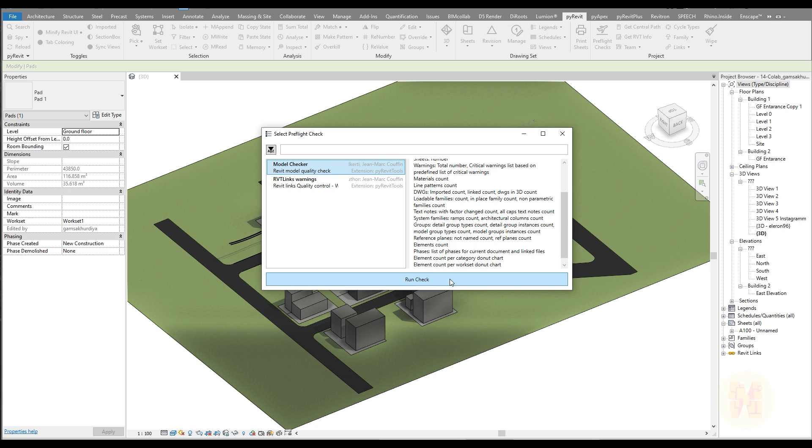Let's check our model. Here is model checker, I will select it. Here is a small instruction about what will actually be checked, but I'll show you in the end, or you can check the result yourself. I will start the result. Here you should say yes, because it's the scenario of your checking. That's it, and here you get the pop-up menu with the checks.

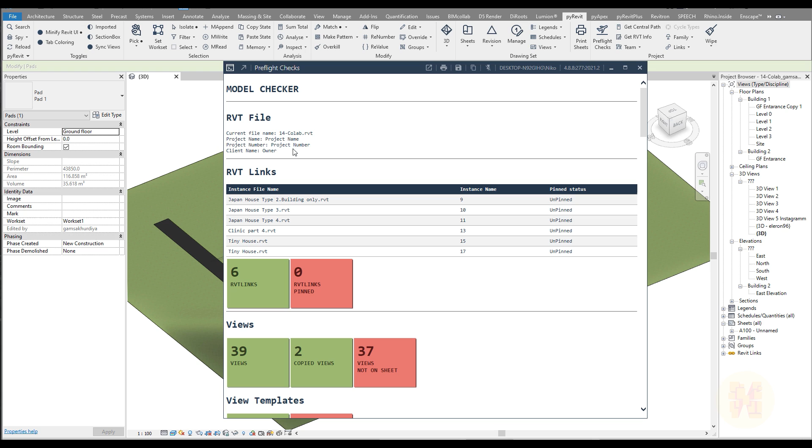I will show you, we will start from the main page. Here is the name of our file and main information. Here is all the file instances in our file. As you can see, this is correct because inside this main file I have a lot of different imported Revit links, here are our Revit links. How many views you have, how many views not on sheets, view templates, schedules, and a lot of different information you can get just by one click.

You can even save this information and transfer it, for example, to your architect, saying like, guys, you have thousands of views not on sheets, please delete some views which you're not using, or you can delete them yourself. Here is the nicest thing, the warnings types.

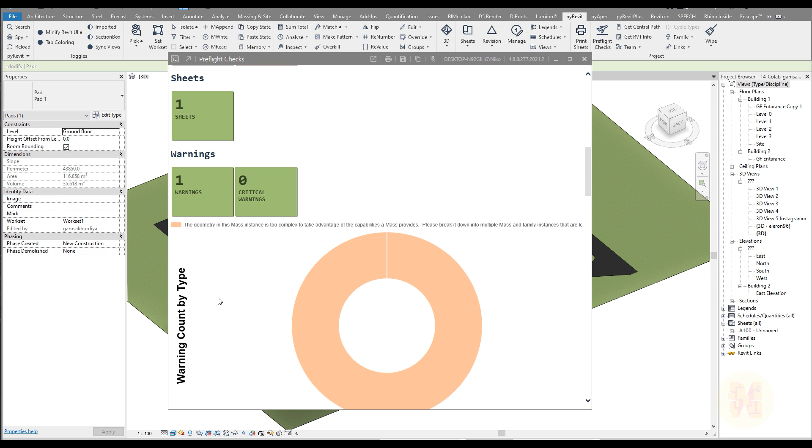As you can see, the geometry mass instance too complex. This really helps you understand, for example, when you get warnings, divided by which type of warnings you have. Materials, how many materials you are using in your project, and what I really like, this is loadable families in place, families not parametric, and a lot of different things.

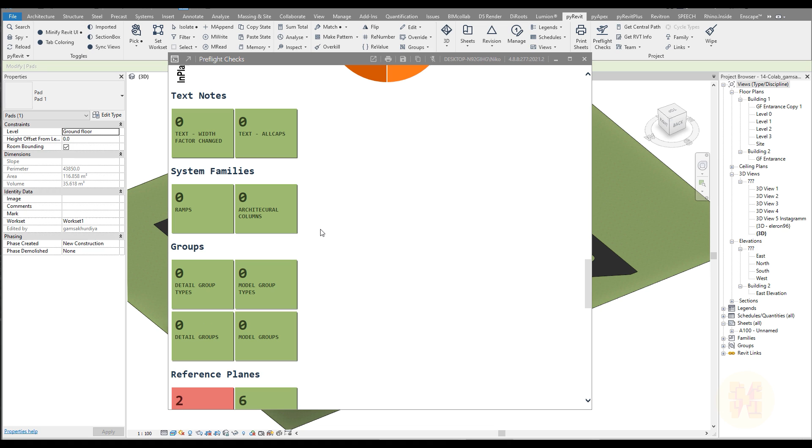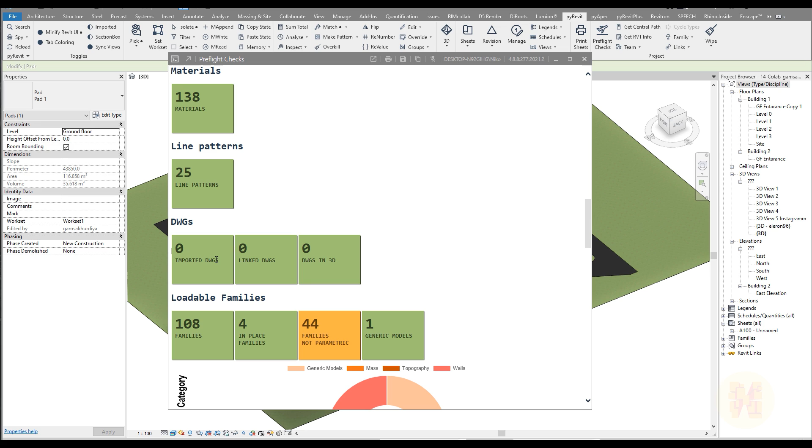Also, what I like, anyone working as a BIM manager knows this really painful thing. This is DWG, where is that? I will show you, it's here, imported DWG. Nice thing, here there's no imported DWG, but people working a lot with architects know we sometimes have a lot of different pre-imported DWG files inside Revit, and it makes working with Revit really hard, because if you have a lot of imported geometry from, for example, a DWG from AutoCAD file,

it makes it really hard to work with Revit properly. So here, as you can see, a lot of different information, even counted by category elements, so you can see how many elements you have, and as you can see, Sketch really has a lot of the models. Sketch, this is lines, it's lines between, for example, a separator between rooms or something like that. This is actually lines.

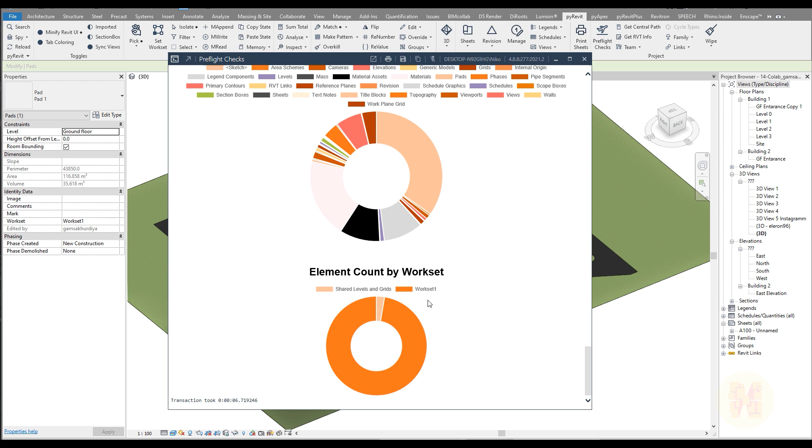Here we have a lot of materials and elements counted by work sets, but this depends. For example, in my company I divide the elements by work sets, wall should be in one work set, floor should be in another work set. In another company they use different types of work sets, for example by name. In other companies they don't use work sets at all. So this depends, but the pre-flight checks can give you some information about your model, and it's really useful.

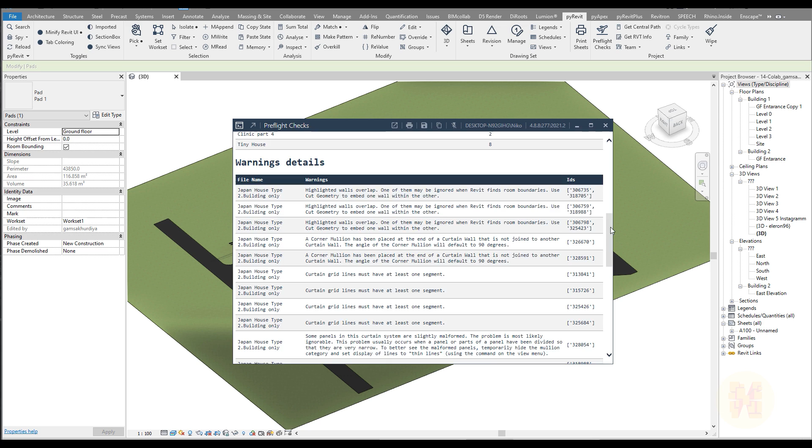Let me show you another type of pre-flight check. This is Revit links warnings. Let me start it, and as you know, here we have a lot of different Revit links, and here you can see warnings counts where we get a lot of warnings. For example, in this house we get a lot of warnings, like 11. We should do something with that.

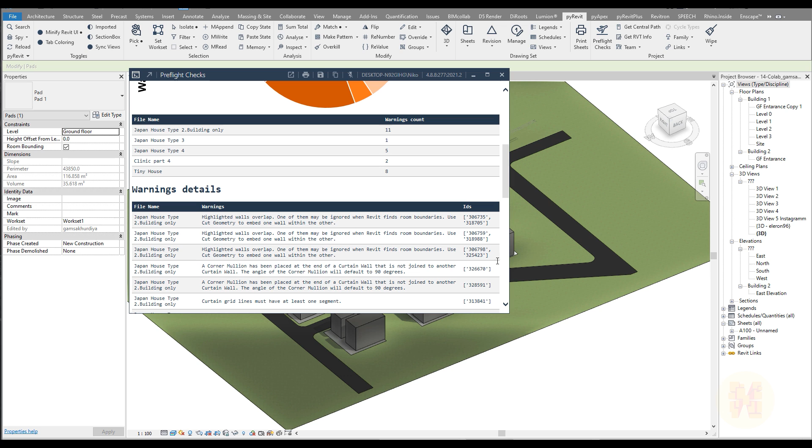11 is actually not a big number, because in some of my projects we have like thousands of warnings. But anyway, you should understand where you have a lot of warnings, because if you get some problem, you should understand where you should mention it and where you should change something to make Revit work properly.

Here's some warnings translated, so you can see what type of warnings, and here's the ID of the warnings. It's really nice, just one click and you get all information for all these files, just one click.

So this was about the pre-flight checks. Actually, I'm trying to create my own pre-flight checks now. If I succeed with that, I will explain how to do it, but right now let's move on to another really nice thing in PyRevit that I find useful.

Let's have a look. As you can see here, I have a lot of different tabs for different programs, even my own tabs. It's not so useful when you have a lot of add-ins. Some you don't use, some aren't relevant, but you don't want to delete them, you want to leave them and maybe switch them back on later. How can we do that?

With PyRevit you have this option here: Minify Revit UI. Let's click on that. If you just left click, it won't work - you should hold Shift and Control and click. After that, Revit starts counting how many tabs you have. As you can see, it's counting, you just need to wait.

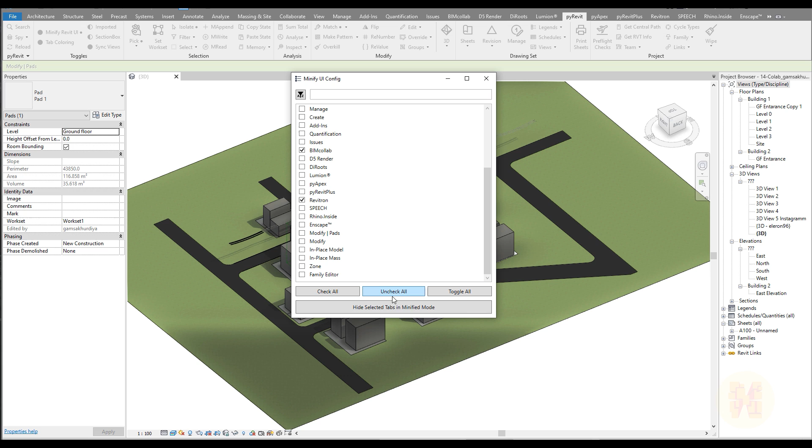It takes a bit of time, and now Minify is asking us which tabs we want to hide. Be careful, because some tabs are system ones. For example, I want to hide some tabs - let's say BIMcollab, I don't want to use it. It's here, as you can see. And let's do one more - Revitron, I don't want to use it either. Here's Revitron. Let's click on that and hide the selected tabs in minified mode.

I'm just clicking on that. It's taking a bit of time. Let's see - BIMcollab, still here, let's close it and click on Minify Revit UI. Now it will work, and as you can see, BIMcollab isn't even here anymore, and Revitron isn't here either.

It's useful because if you want to go back, just click on that and it gives the tab back. And if you use Ctrl Shift click plus left click, you can modify it again. As you can see, PyRevit is making our life really nice.

I don't think this is for architects - I think it's mostly for BIM managers and BIM coordinators, because we always have a lot of different add-ins, and sometimes we need to manipulate with that, because right now, as you can see, it's really going to be messy. And one more of the nicest things for me, the reason why you should install PyRevit right now.

This is tab coloring. I will, for example, open one more file - I'll even create one more file, a new project. It doesn't matter which template, let's just use the standard one to create another project. Yeah, even the Imperial one, why not. So here is another one, and I'll go back to my 3D view and also level 1.

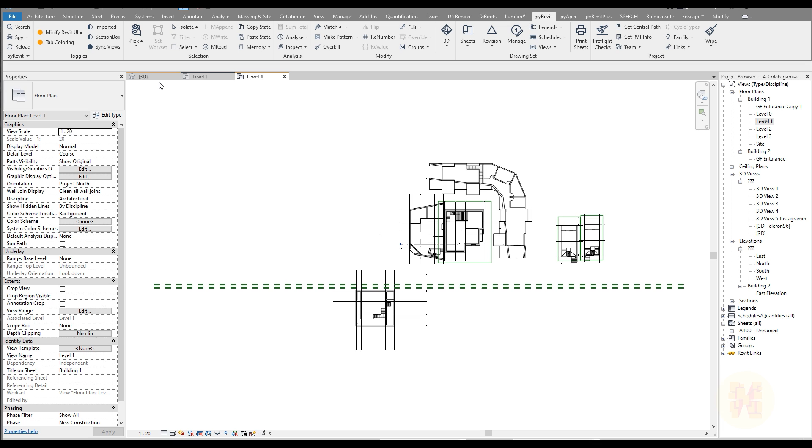By orange we understand - I'll explain - by orange it means this is one file. So I have the color orange and I understand this is the file called Collab. And this one is the new project because it has another color.

If I create one more project, it will also have its own color. I'll open it up, and as you can see, it's already blue. By this small tab, you now easily understand where your files are, I mean similar files.

And your question - how can we change the colors or manipulate with this tab? You just go to the settings, then go to UI, it's here, and you'll find it here: colorize open documents, as you can see. Here you can change the colors, order, whatever you want.

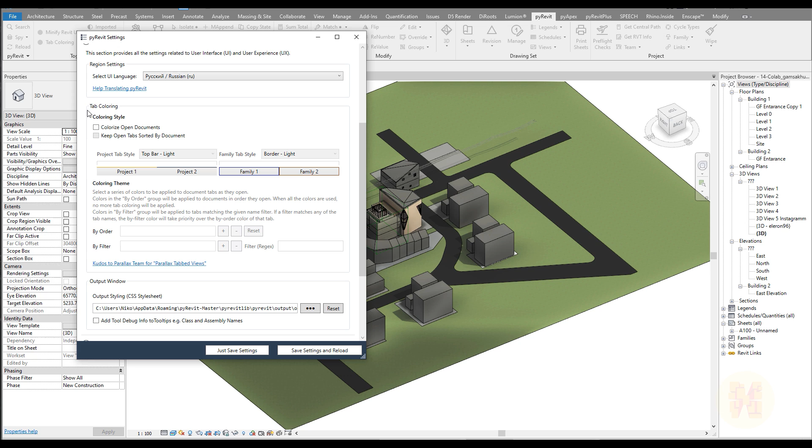So all the settings you'll find under tab coloring. This is pretty awesome. Just save it, and after that I recommend you reload PyRevit and everything will work. So these are the 3 main things why you should install PyRevit right now.